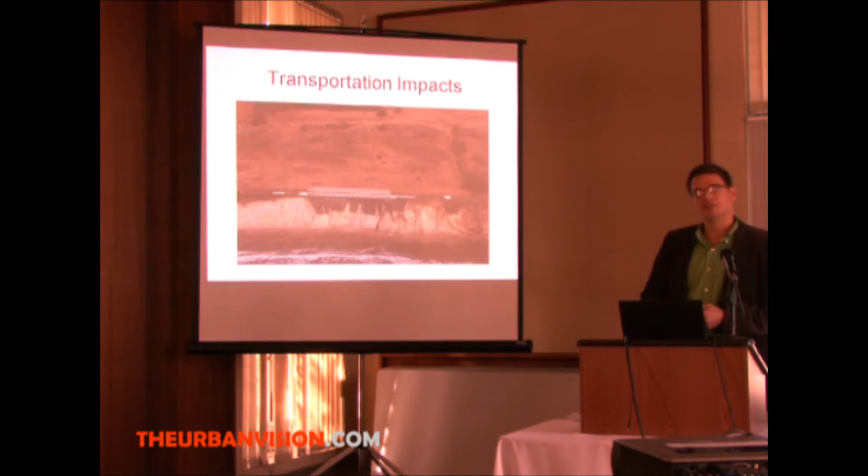The ocean is this massive thermal mass, and it has a lot of inertia associated with it. So oceanographers and climate scientists tell us to expect this is going to go up for thousands of years. So not just our grandchildren, but great-great-grandchildren are going to be living with our consumption and our use of fossil fuels and resources for a long time to come.

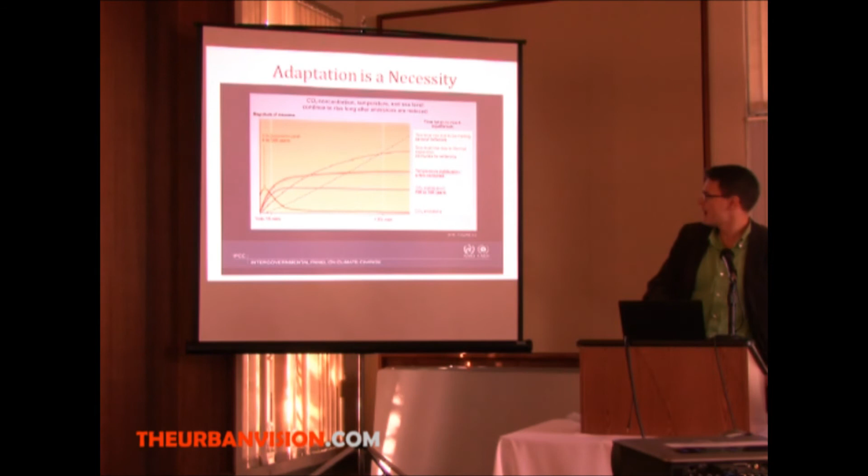So this was just one of them. We decided to look really at flooding. If you look at what's happened to sea level rise, we're lucky in San Francisco—we have a tide gauge down at the Presidio, right by the Golden Gate, and they've been measuring tides since 1854. If you look at the trace of tides, they go up and down a lot every day, about 2 meters daily. But over time, over the last 100 years, they've gone up by 8 inches.

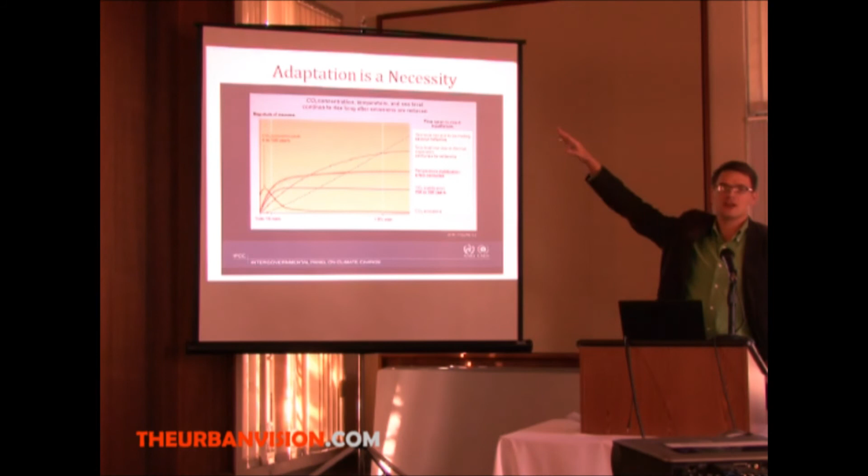It doesn't sound like much—it's about 2 millimeters per year. So you think, well, if I'm on the coast, I can just kind of get out of the way really slowly. It doesn't take much to move 2 millimeters per year.

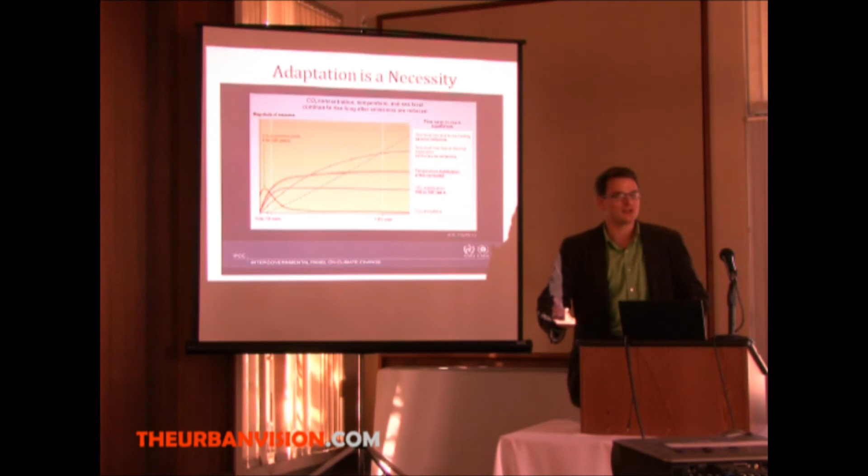But it's not really just these mean tides and high tides that are going to be impacting us. We think it's going to be an increase in flooding, which is really going to be the way we experience sea level rise—these rare events.

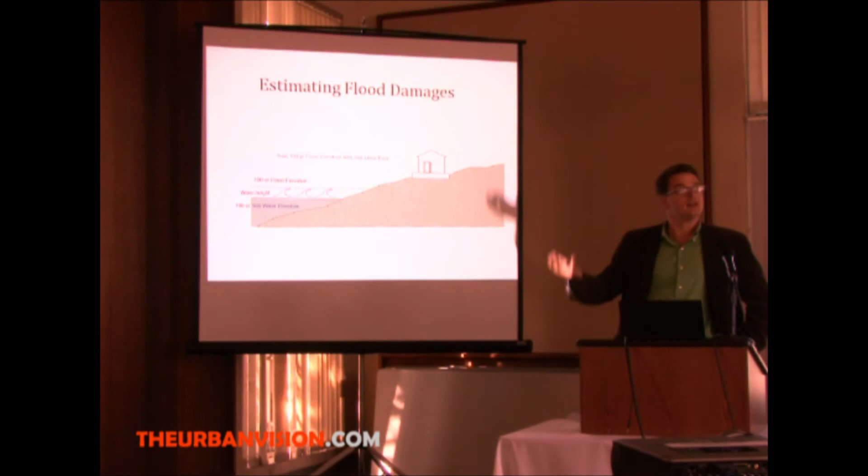So you hear about the 100-year flood in the US. This is what we've decided collectively as a society to do a lot of our planning and insurance around. That means it has a 1% chance of occurring in any given year. So in theory, if you're building somewhere along the coast, you should be above this 100-year flood elevation, which is a lot higher than mean sea level or high tide.

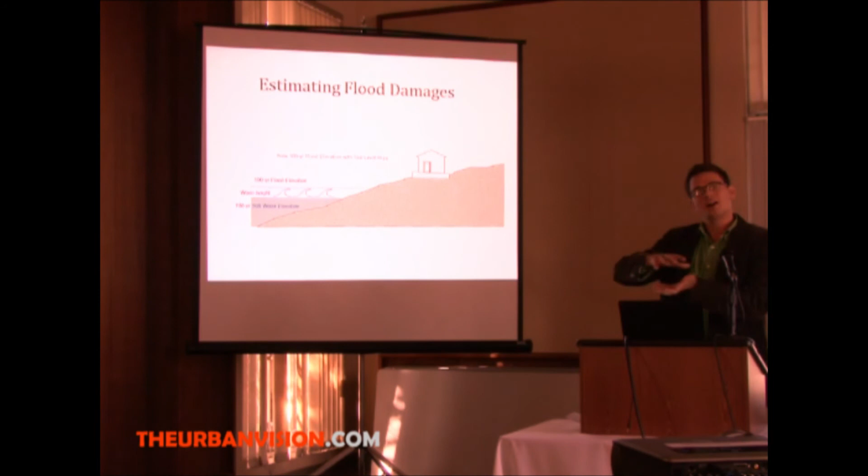But as sea level rises, the entire tide regime is going to be going up along with the flood elevation. So we looked at a scenario.

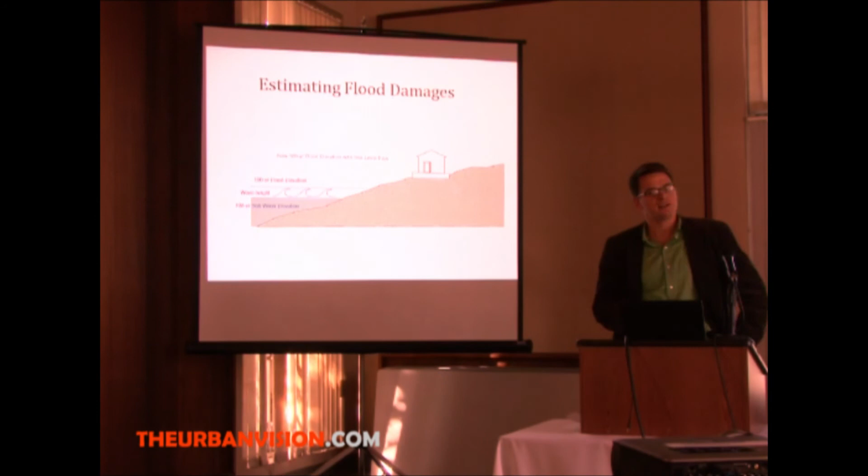As we were doing this study, we realized it was very important to get good science and have all the people who are going to be using our results really buy into the study. So we worked closely with different regulatory agencies, as well as scientists from well-known institutions—the Scripps Institution of Oceanography at the University of California San Diego, and scientists from the US Geological Survey—to bring this data together.

What we looked at, these aren't certainties—we don't know exactly where these lines are going to be. For a long time, people have said, oh, there's so much uncertainty, how can we possibly plan? Well, it's irresponsible not to plan for anything.

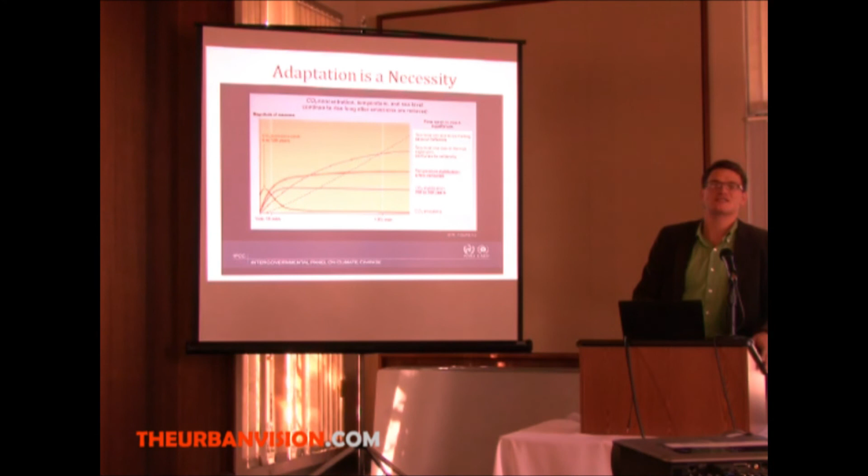So these are all just various different scenarios, different storylines, we call them. Sea level rise may be 10 centimeters, it may be 3 meters. But what are the likelihoods of some of those? So we ended up using a sort of medium-high scenario. In climate speak, it's the A2 scenario.

This was from conversations with a lot of the different climate scientists who believe that this is one of the things that could happen. So that came out to 1.4 meters by the year 2100 of sea level rise—that's 55 inches. That's pretty dramatic, and it caused a lot of people to really stand up and pay attention.

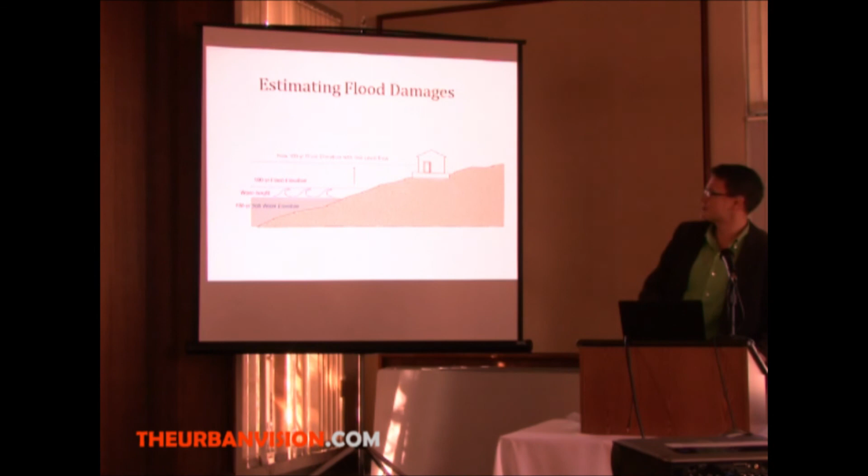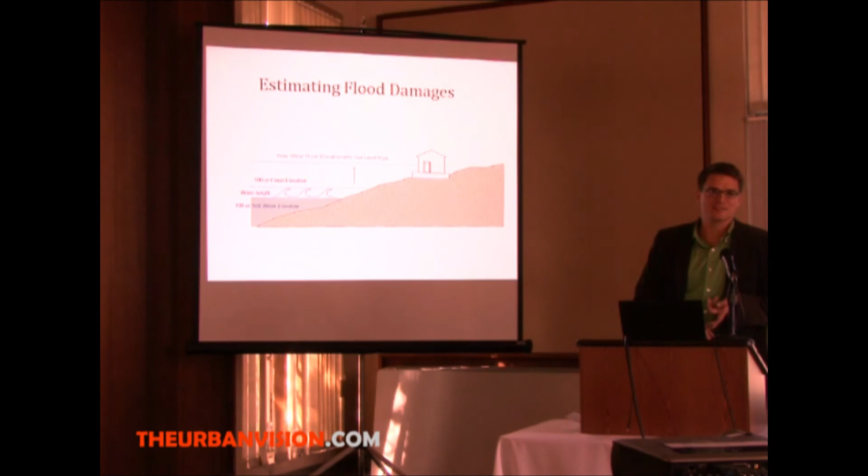So you see this entire flood regime going up by a certain amount, and that puts a lot of existing development at risk. Along the coast, we're accustomed to living with risk—a lot of people already have floods that take place around the state all the time, but this amount of risk is going to be higher in the future, we think. And our current infrastructure—levees, seawalls, etc.—isn't going to be able to withstand the flood risk we're going to be seeing in coming years.

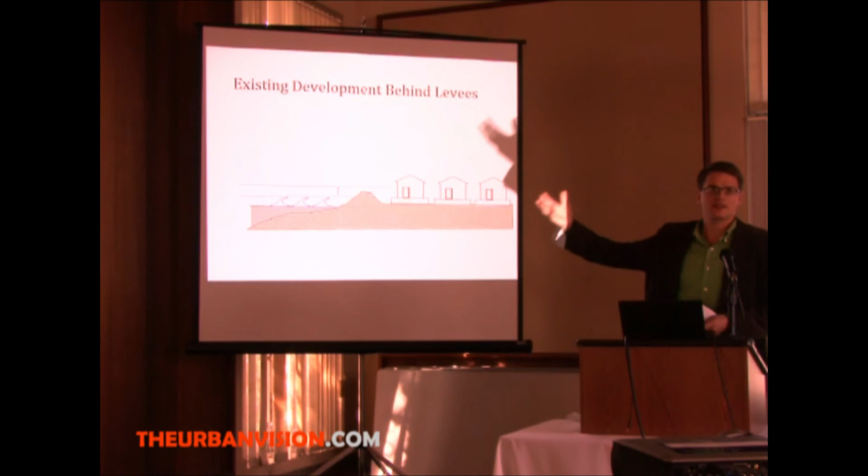So we're looking at massive infrastructure spending to raise, strengthen, and fortify some of these existing flood defenses. Here's an example, I think this is in Hayward, a little bit south of here—typical for what you see around San Francisco Bay, these low rock walls called riprap, or these levees, with a lot of development right behind that.